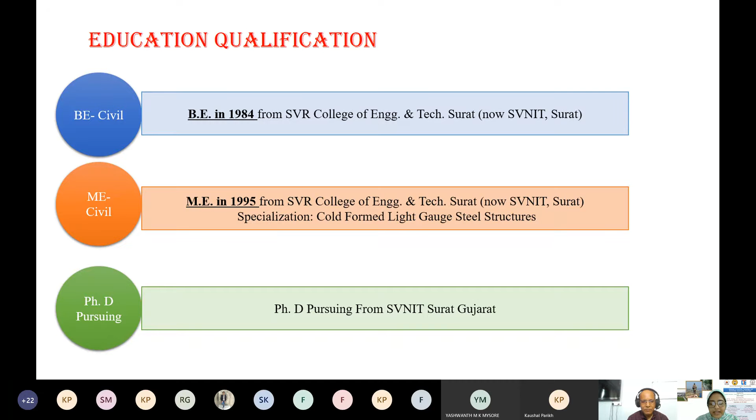In our second session of the day, I hope you all enjoyed your lunch. I hereby welcome all the participants and delegates in our one-week training program on advances in concrete technology and sustainable construction practices. We heartily welcome our expert, respected Professor Jai Prakash Sharma sir. Sir is associate professor in applied mechanics at Government Engineering College, Bharuch, Gujarat. Sir has completed his BE and ME specialized in cold formed light gauge steel structures at SVNIT Surat, Gujarat. Sir is doing excellent PhD work on an innovative technique, sacrificial anode cathodic protection, for protection of steel in RCC from corrosion, and recently he will be submitting 2 patents on it. At the beginning of his career, sir has worked as assistant engineer under Ukai Civil Circle for 5 years.

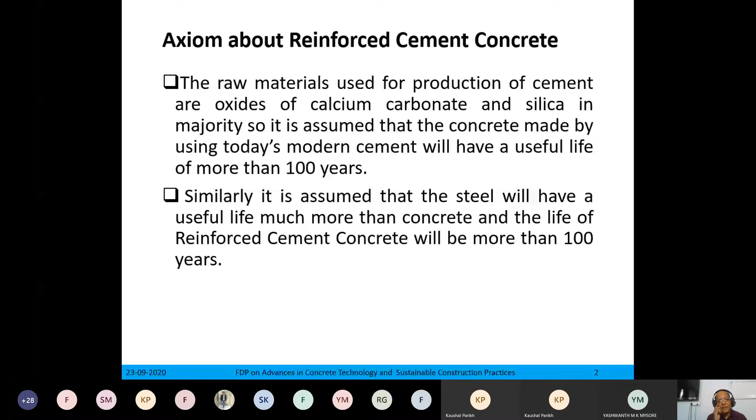Yes sir. So after so much knowledge about the different variety of good concrete, we still face some problems in real practice. What is happening is that the general thinking and well established truth is that the raw materials used for production of cement are natural materials, that is oxides of calcium carbonate and silica. So we are assuming that whatever is made by these natural materials will have a long life, as other things in nature have. So our assumption is that today's modern cement will have a useful life of more than 100 years, since this is made from natural raw materials, calcium carbonate and silica. Similarly, we also assume that steel will have a useful life much more than concrete, and the life of reinforced cement concrete will be more than 100 years, since this is a combination of two materials which have more than 100 years of life. But what is the bitter truth, or I'll say the truth you have to accept?

With the advancement in technology in cement and steel, we became more and more confident that any structure made of reinforced cement concrete will have a lifespan of more than 100 years. This we are assuming, this we are teaching, and in the majority of cases, in costly structures, utmost care is taken, and then this is true. But what about the other structures which common public is making from their hard-earned money or purchasing with their hard-earned money? That is not there - the 100 years life is not there.

What is happening? There is some natural process which is going to happen. It is beyond our control, just like tsunami we cannot control, earthquake we cannot control. Similarly, there are some laws of nature we cannot control. And what is happening in real life is that in the race of development, we forgot the law of conservation of energy, which is responsible for changing one form of material to another form. The cycle may be few hours to 1,000 years. In case of buildings, we can say few years to 100 years.

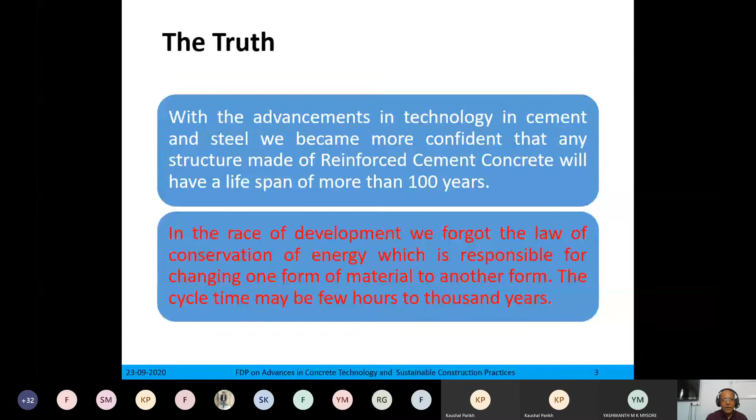Now, what is contradiction against the earlier 7 sessions which you listened patiently? The recent failures of reinforced concrete structures have indicated that if RCC structures are not properly designed with respect to the environment condition, or if good materials and proper construction practices are not adopted, which we are discussing a lot since last 7 sessions, and suppose these two are followed, then proper and timely maintenance is not done, then the deteriorated structures will have no solution but demolition due to corrosion of steel.

Some structural engineers justify this, saying demolition is necessary because previously structures were built for the requirements of that time, and now our requirements have changed, so let us demolish and go for a new one. In a few cases this can be justified, but not in all cases. I will discuss the cases where demolition is not advisable, and if it is not demolished in time, it may collapse someday.

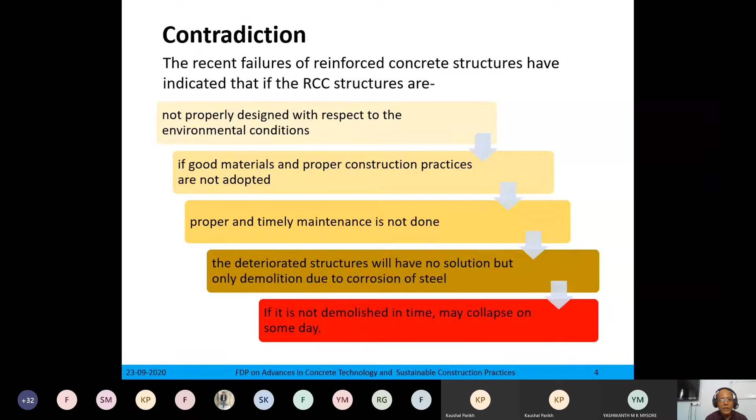Collapse is not a simple word we just use in the sense of 'let's forget these things.' No, recently in Maharashtra, in Raigad, you have heard in the news that a building collapsed and 15 to 16 people died. This was a complete collapse. Similar cases happened here. This is the reality we must accept and take remedial measures so this doesn't happen. It is not only loss of property or national revenue, it is loss of life also.

And why? If we are talking about being so advanced that we can have concretes of very high strength, high workability, durable, every property we have discussed, if that is there, then why is this happening? The reality: there are two cases. One is from Surat, another is from Baroda.

This is the case of Surat. Here also, loss of life was there in Baroda. In this case, this picture shows the drawing room portion. Three floors completely collapsed - the drawing room of 3 floors collapsed around 8 a.m. The second figure shows these 3-4 blocks; 2 blocks of that complex collapsed in the early hours of the morning. In both cases, there was loss of life and loss of property. You can see this Kanhaiya Palace building is demolished.

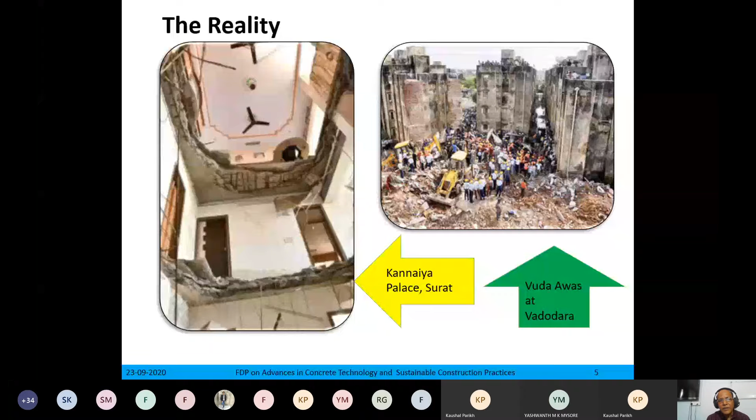Now, what are these 2 cases? These are only 2 cases out of thousands in the last 4 to 5 decades. I will explain the reason later. The first image I showed was Kanhaiya Palace apartment, built in 1994 only. The slabs of drawing rooms on 3 floors collapsed on 2nd May, and 3 persons lost their lives. A complete building was rejected and 3 lives were lost.

Surat Municipal Corporation appointed a committee of expert structural engineers. They gave their report that poor maintenance was the cause of this failure, leading to corrosion. Some concepts were given, and points were also raised that the initial construction was not very good.

The second image, as I said, is the collapse of 2 buildings built by Vadodara Urban Development Authority, VUDA. In every city beyond municipal corporation limits, there is some area defined by the authorities known as Urban Development Authority, and they construct houses for the lower middle class or lower class, or for rehabilitation after removal of slums. In that case, there is a concept of economical housing, and in the name of economy, poor material and poor construction happen. In that case too, corrosion was the major cause.

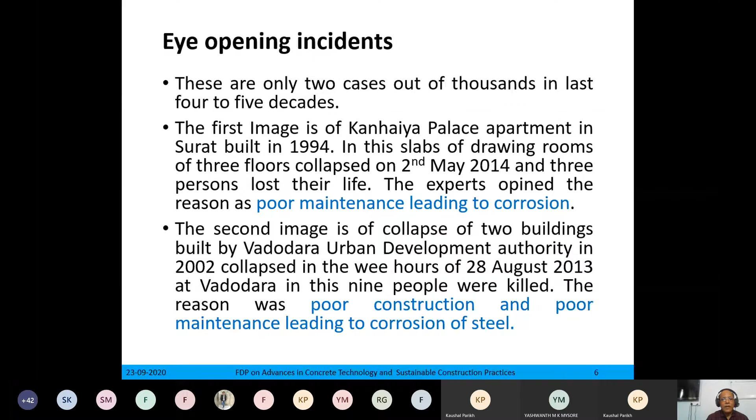Then what is corrosion? This is the basic concept. I have started from the basics so it is useful to persons who are not directly related to these things, so they can understand. It is nothing but a chemical or electrochemical reaction between a material and its environment. There can be any type of environment, any type of material, that causes deterioration of the material and its properties.

In RCC structures, corrosion occurs in both concrete and steel. This is certain. In the case of concrete, there may be carbonation or other reactions also, but corrosion of concrete is very slow compared to corrosion of steel.

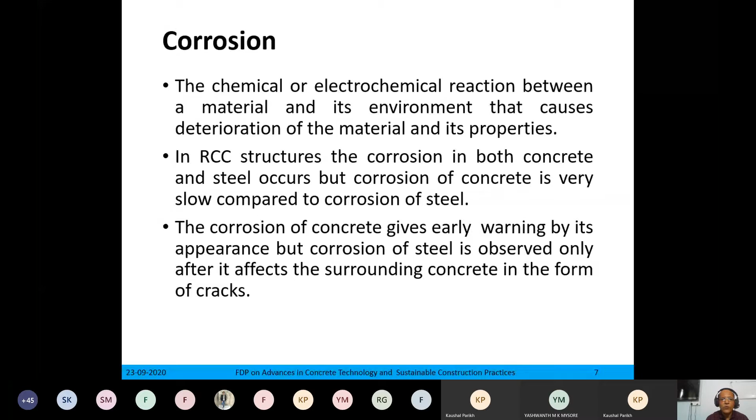But in case of steel, it is observed only after it affects the surrounding concrete in the form of cracks. At a later stage, when the volume expansion of the steel occurs due to corrosive product, at that time you come to know that now there is some problem.

Now, why is there need of corrosion protection of steel in RCC buildings? I have given the need of corrosion protection of steel in RCC buildings. Why have I used this word RCC buildings?

The reason is that for bridges or any government or organization structures, there is provision, they have money, they can go for any type of protection method because authority is there, and agencies are there. But in case of buildings, multiple ownership is there always. So obviously what is happening here is studied and then some remedy is to be found out.

What is expected life of concrete? We have assumed that it is more than 100 years. We also talk about the expected life of steel if protected - it is also more than 100 years. We have one bridge at Narmada, a steel bridge, which has completed 125 years. Many bridges in the world have crossed 100 years. So there is no doubt about the life of steel.

What is happening? The real life of RCC structures, especially buildings, we are finding is only 20 to 80 years. There are several reasons - I am not going deep into that. One of the reasons is the construction practices we are adopting. We devise some method, but less qualified contractors are using that technology without, I'll say, precaution.

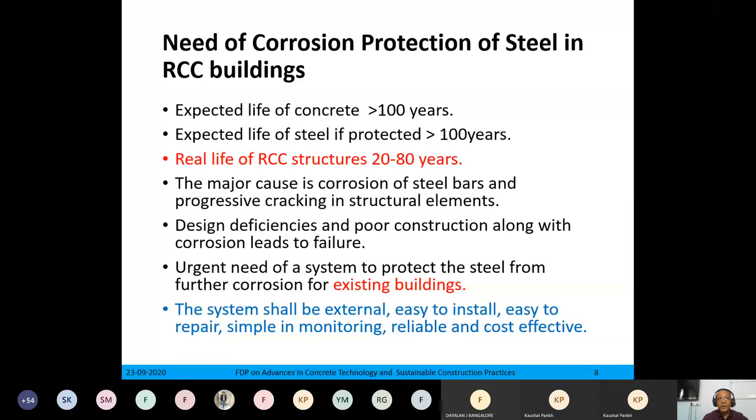So first let us understand the mechanism behind this corrosion, and on that basis the technology will be better understood. The corrosion process in RCC is electrochemical in nature.

The process is very similar to a battery. Everybody has seen the single cell. What is happening - the outer side is zinc body, the inner side, in the center, one carbon rod is there, and in between these two, electrolyte is there, and at the top plastic body is there to separate that. Whatever current flows, flows through that electrolyte.

Previously, if someone can remember, in the torch or some radio or other equipment, the batteries were leaking. Later on, the technology improved and we got cells like that - there is no leakage in that.

Corrosion is nothing but the result of flow of electrons between cathodic and anodic sites of rebar. Suppose one reinforcement is there, on that one spot behaves like anode, one spot behaves like cathode, and current flow starts. Four basic elements are required for corrosion to occur: anode, cathode, electrolyte, and metallic path. If we can control these four, then there is no corrosion. But how it is not possible, I'll explain later on.

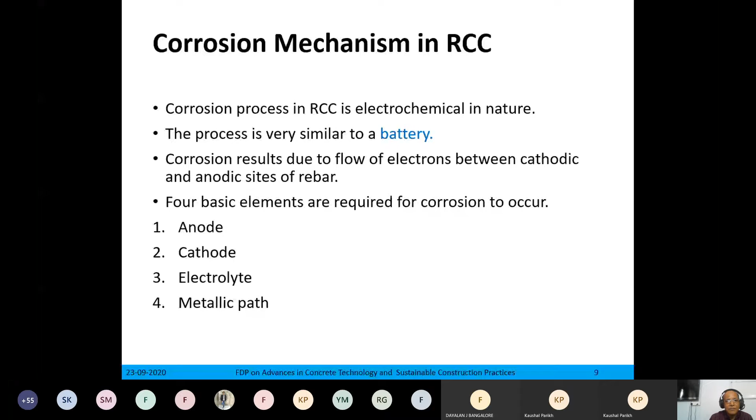What is the anode and cathode formation? It is steel embedded in concrete. For corrosion to occur, an electrochemical cell must be established, meaning these four elements are there, as explained earlier. The anode is the area where oxidation occurs and electrons are released. Whatever metal is there, if in stable condition, then it's okay. But if it is disintegrated into ions, plus or minus, from there the electrochemical cell is established. The cathode is the area where reduction takes place or electrons are consumed. This is theoretical part; later, in pictorial view, you will be able to understand.

Steel in RCC acts as only cathode when it is in passive state, meaning initially you find that there is no corrosion. The reason is that the pH of fresh concrete at initial stage is always more than 12. Later on, it goes on reducing due to carbonation or other factors or material properties mixed together, and the pH reduces to 9.5. Lesser than that, when pH is less than 9.5, there are chances of corrosion. That's why initially there are no cracks, meaning no corrosion. After 4 or 5 years in buildings, you observe some cracks in beams, slabs or columns, especially below the bottom of washrooms.

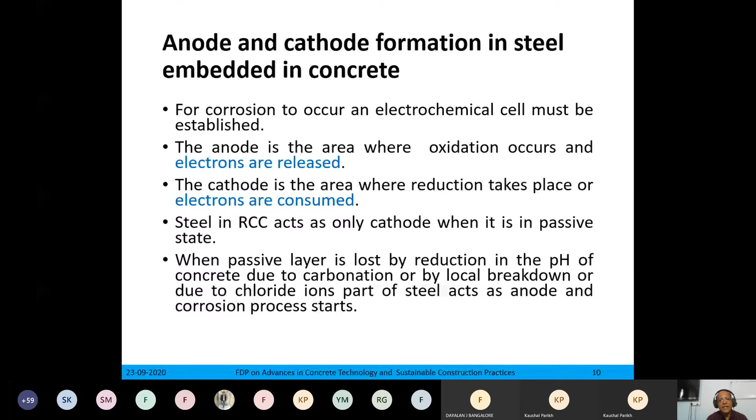When this passivity is lost by reduction in the pH of concrete due to carbonation or by local breakdown or due to chloride ions, part of steel acts as anode and the corrosion process starts.

Now this is better explained. The iron disintegrates into plus ion and electrons are released. These electrons require two things: moisture and oxygen. If any one is missing, corrosion will not occur. For example, at seashores, certain structures in saline water show corrosion at the level or height where fluctuation of water takes place, meaning wetting-drying process occurs, so it gets oxygen and moisture both. So at the cathode, these electrons combine with moisture and oxygen and form hydroxyl ions, that is OH minus ions.

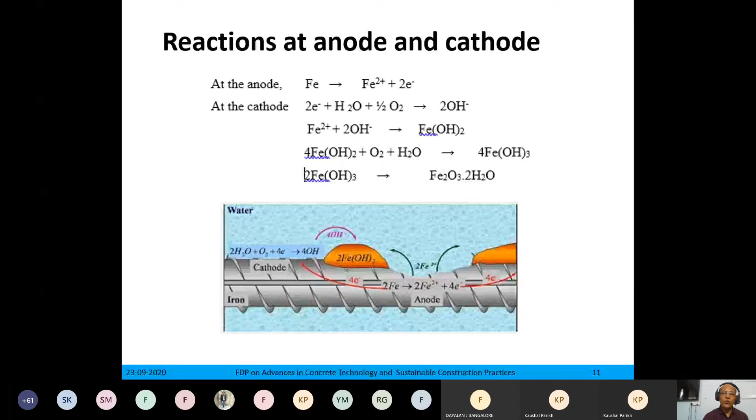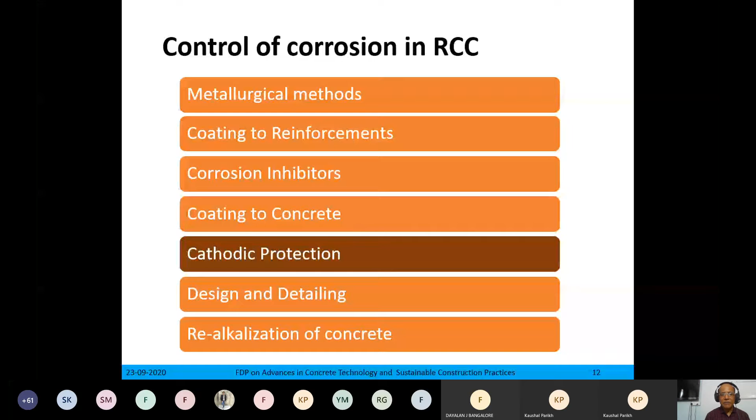Then the question is, if so many methods are available, why is corrosion still there? Why are we allowing corrosion to happen in RCC structures leading to ultimate collapse? We are lacking somewhere, and I have tried to find one solution to that, which we will discuss later. If you see the methods for corrosion protection, one is metallurgical methods. In that, one is CRS, corrosion resistant steel, made by Tata, SAIL, Jindal, and many other companies.

This was introduced roughly in 1995. It has a property that, while there is some corrosion, it forms a film on the surface of the steel bar that is nearly orange color, not dark red like rust, and that film delays the corrosion. Please remember, it only delays the corrosion - you cannot say this is 100% corrosion resistant.

There is no loss of corrosion resistance during transportation, bending and compaction. This is a very good thing. In Surat, I have seen a structure built in '96 or '97, and till today I have not seen any crack. That is this steel - I tested it also, so I know this is a good thing.

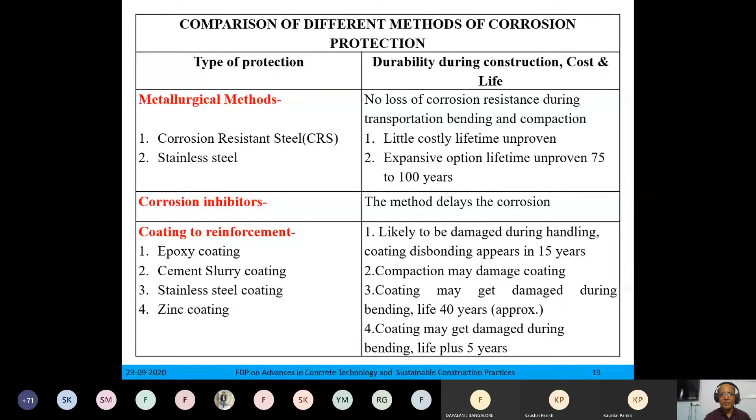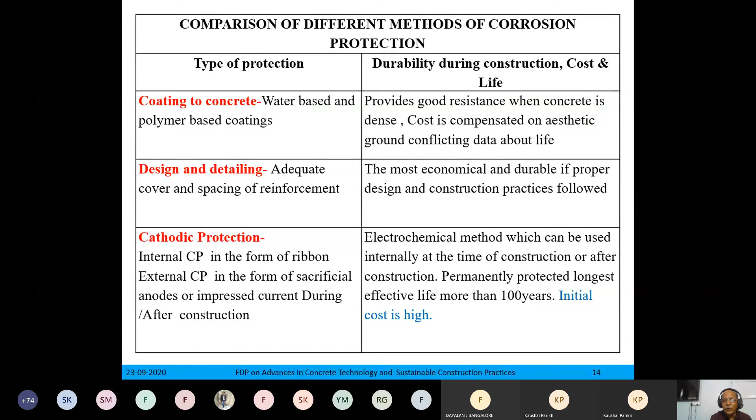So here it is just like a remedy, that we are providing anode that takes care of that building. It is just like indirect insurance. It protects the buildings and the life is unlimited as long as that anode is available.

Another method is realkalization of concrete. Here, suppose pH value falls below 9.5, we are increasing the pH of the concrete. We provide external current to the carbonated region of concrete to increase the pH to a satisfactory level, above 9.5. The process is not very common.

It is applied to carbonated concrete. Cost is high, but life is unpredictable. The reason is that once you increase the pH, for how much time it will remain above 9.5 is a question, because again the environment is same, everything is same. So here life is unpredictable.

And second thing, this is very specific technology. You cannot make people confident that okay, you have adopted this process and now the corrosion will not happen. This is one of the drawbacks.

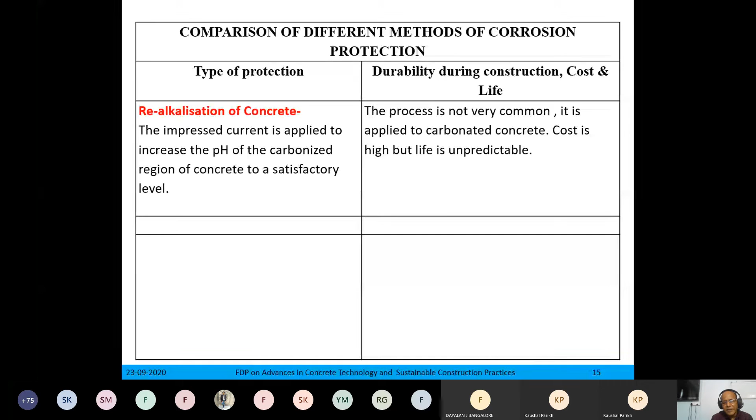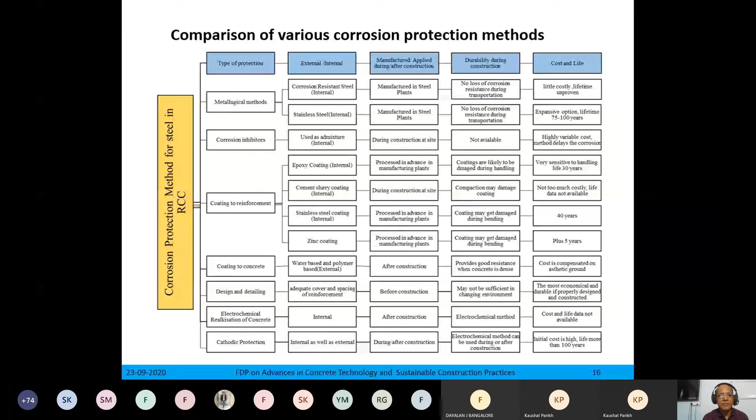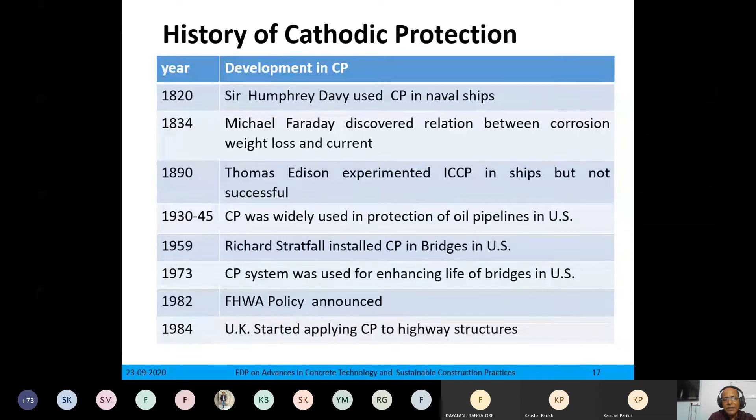Okay, so after 200 years, I can say you can also judge how many buildings you have seen where CP is installed. Probably 50% of the participants have not seen that anywhere in a building it is installed.

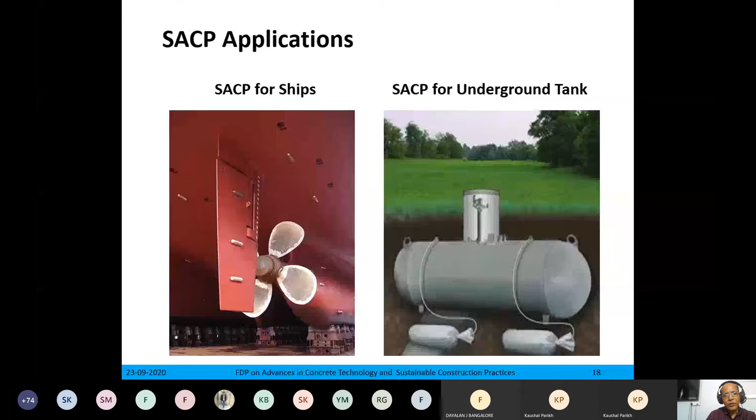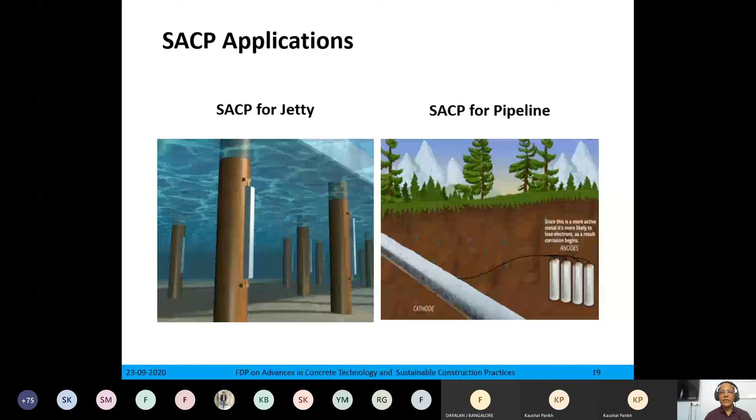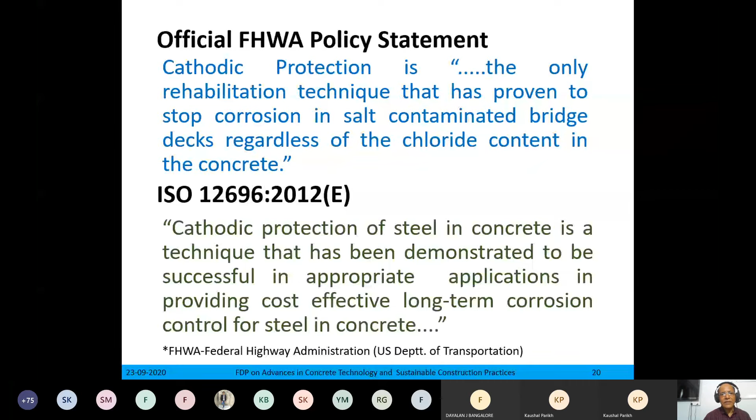Now, these three documents I have put here, they say cathodic protection is a means, and somewhere they say it is the only means.

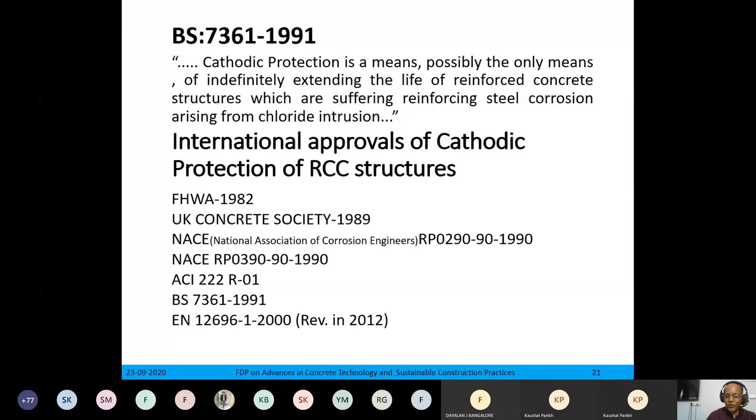Only thing is, after so much detail, why is it not common for buildings? This is common for pipelines, there is no problem, but it is not common for buildings.

Then another question is whether you can apply this cathodic protection system to new structures initially from the beginning. So for that, these documents say it is uncommon to find the use of cathodic protection justified for a new structure at the design stage if alternate economical means are available to prevent corrosion. Now please listen, alternate economical means whatever we have discussed earlier.

If compared to cathodic protection, other options may be economical. Suppose you are using CRS steel, so that is economical, so it is better to go for that rather than cathodic protection. Or if you are using corrosion inhibitors, which are chemical and mixed into the concrete, if they provide good resistance to corrosion and long life to a structure, they shall be used instead.

However, if a decision is taken at the design stage to apply cathodic protection to a new structure, provisions can be made during construction to facilitate the later application of CP. If certain provisions are made in the new structure for the future, then if something happens, we can go for cathodic protection. The authority has to decide whether this initial provision is required in the structure.

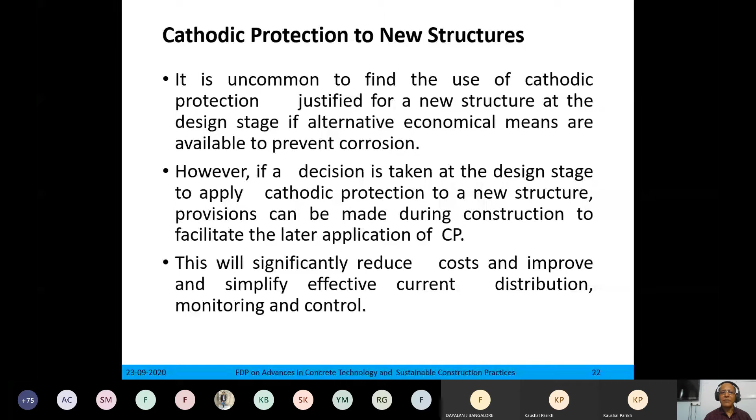So what type of provision is possible? One is that we need exposed steel, or steel covered which can be exposed later on to connect the anodes. This provision becomes economical, useful for aesthetic view, and ensures proper connectivity of anode if possible. So once we decide that we need some provision for later cathodic protection, that provision can be made. Now there are two systems.

This is the broad classification. One is impressed current cathodic protection system. Here we are providing anode as well as providing current. Whatever current is developing between those two dissimilar metals, we use that, plus we provide current from outside. The large driving force available can protect a large, even uncoated structure in high resistivity environments.

For example, suppose a pipeline is there, 1000 kilometers long. Just imagine how many anodes are required throughout the length, and suppose the life of an anode is 3 years, so again at the time of replacement a new anode is to be installed. That is a costly process. So for that, impressed current CP system is most suitable, and obviously only a few anodes are required.

Second thing, wherever the potential difference is not developed or is very less, which is not able to effectively protect the steel from corrosion, because potential difference is required for flow of current, here artificial voltage can be improved. You can increase the voltage. Generally it works at 24 volts, so you can go for a higher one.

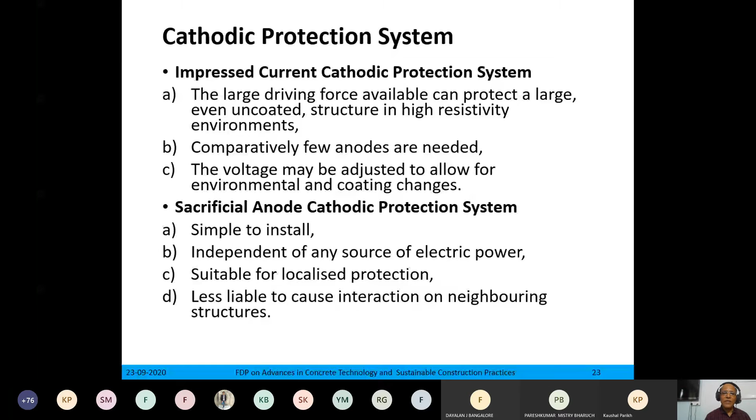The flow of electrons is possible only when a conductive solution is there. So corrosion takes place when two different metals are immersed in a conductive solution or environment. The potential difference facilitates electron flow between these two metals. The less resistant metal becomes anode and the more resistant metal becomes cathode.

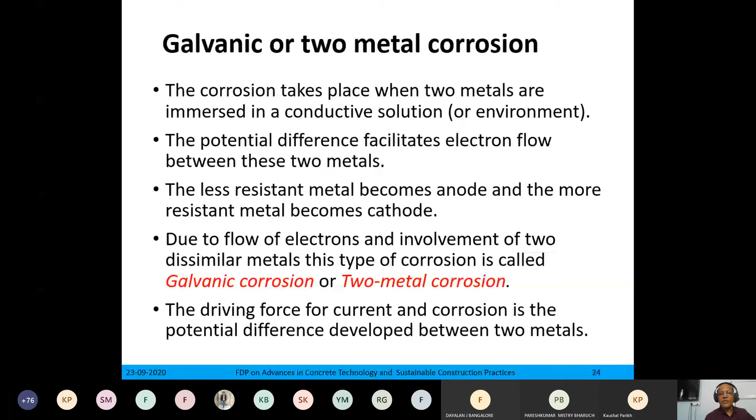What is less resistant? It will come in the next slide. Due to flow of electrons and involvement of two dissimilar metals, this type of corrosion is called galvanic corrosion or two metal corrosion. The driving force for current and corrosion is the potential difference developed between two metals, and this is the inherent quality of the metal.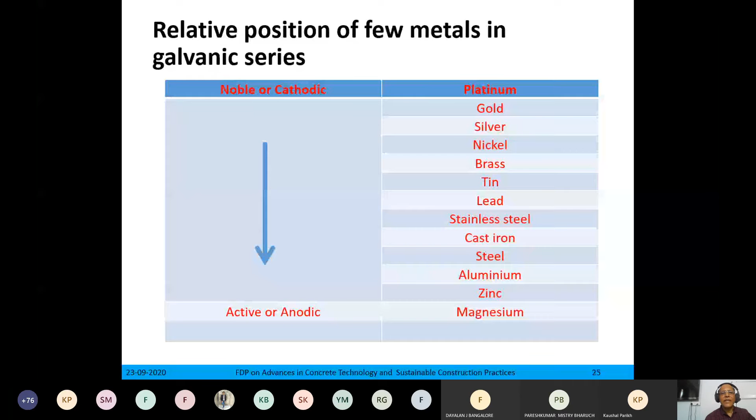If you join these two metals and externally connect them and dip these two metals in an electrolyte, electrons will start flowing and that will convert the anode material into an oxide of that material, and a current is generated.

The same thing is happening to our steel also in RCC. So what is happening here is that steel, having a standard electrode potential of minus 0.44, is converted when anode and cathode formation occurs.

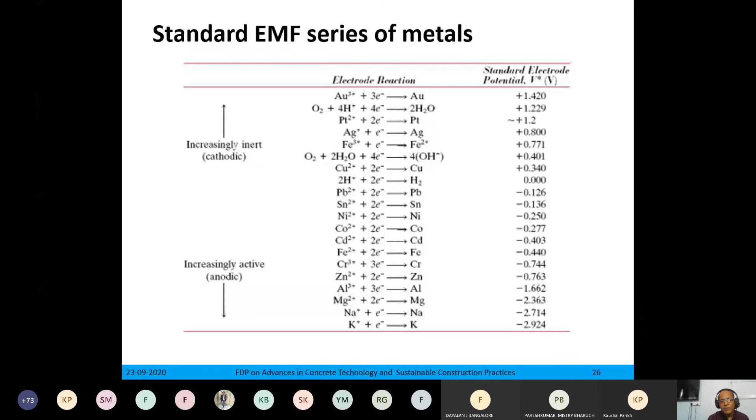Sorry, zinc is 0.763 and this is 0.34. So the difference will be approximately that, depending upon metal quality, impurity and purity also.

So what is done? This anode is buried in soil near the pipeline, and the top wire is connected with nuts and bolts to the pipeline. It is surrounded by backfill material, which is bentonite and gypsum, providing longer retention of moisture so that the electricity circuit is complete, and generally the distance is 3 to 5 meters.

When a pipeline project starts, they keep it in segments, suppose 400 to 700 meters, and they do not join them. So it is one piece of metal, iron or steel, and then this is another anode, they are connected together. Later, when the complete pipeline is laid down, they start connecting and switch over to ICCP, and whatever cables are laid provide current to the pipeline, and the direction of current is such that it attracts and consumes electrons. So our electricity is consumed, but the pipeline is protected.

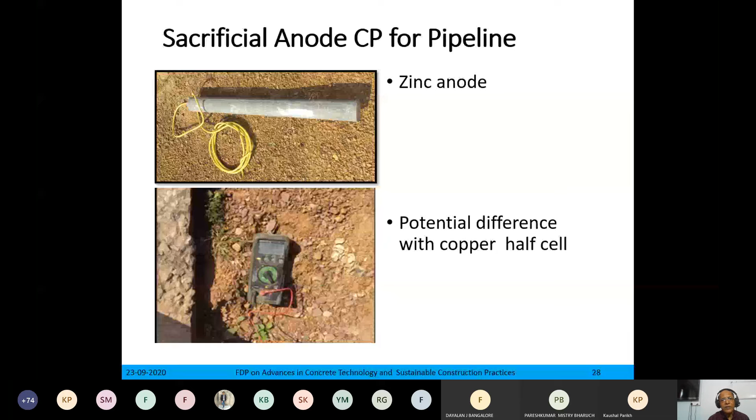Here also, you can see the potential difference between installed zinc anodes and copper half cell. These type of junction boxes are installed generally, they try that it should not be more than 1 kilometer apart because the wiring is costly, but it is generally near the roads for inspection. So every day or weekly, whenever they move from there, they open this, a number of terminals are there. So they can detach and take the potential difference of the anode only, of the pipeline only, or of the connected circuit. Every feasibility is there.

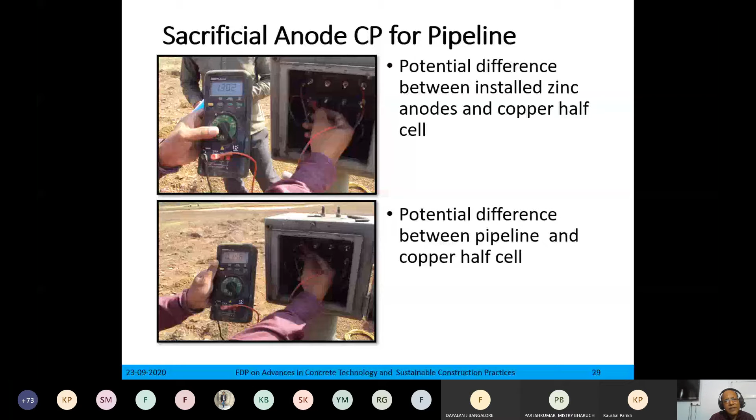Here if you see the bottom figure, it is 0.746. It is the potential difference between the pipeline and the copper half cell. If you see the difference between plus 0.4 and minus 0.37, nearly it is 0.746. So these type of junction boxes are always there along the pipeline, preferably near the roads or inspection roads, so that they can inspect what is happening there. If the anode is consumed, they will not get this value, so they will dig that spot and provide another anode at the same place. This is very common for pipelines, it has started since 1930, and more than 100 companies in India are doing this work.

Now this is the anode for RCC. These are known as button type anodes, discrete anodes. What is done is it is placed in concrete at the time of rehabilitation or repairing, and one terminal wire is connected to the reinforcement. Now this is one part. Another part is that the concrete portion acts as electrolyte. So one complete circuit is made. Whatever electrons are released by the reinforcement are consumed by these electrons.

Here monitoring is not possible. It is just like taking one paracetamol tablet - you don't know what is happening inside the body. Once again, when you feel there is some problem, you take another medicine. So after some time, if cracks are developing, they inspect, open the place, and again other anodes are placed. In ribbon type anodes, this is placed parallel to the reinforcement but not touching it. Please remember, this will not touch. At the end, it will be connected to the reinforcement. So whatever reinforcement is there, that will be taken care of by these ribbon anodes, and the distance between the anode and reinforcement, whatever concrete is there, will act as electrolyte, allowing flow of electrons.

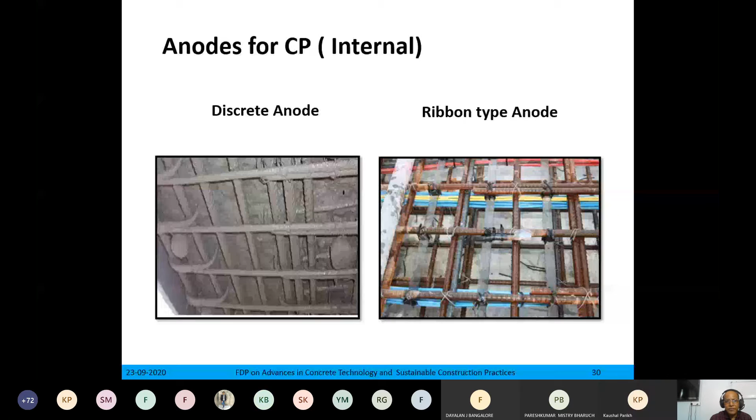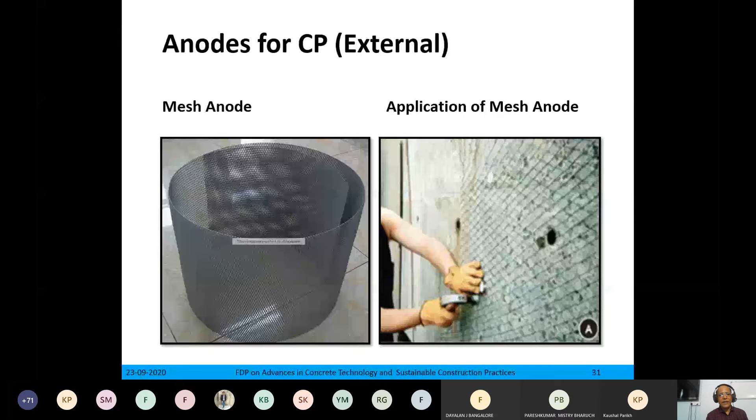Here also monitoring system is not there, they only measure the potential difference of this anode with respect to copper sulfate half cell potentiometer, and accordingly they decide whether it is working or totally consumed. Here, in this case, the name is sacrificial, meaning the metal will be consumed.

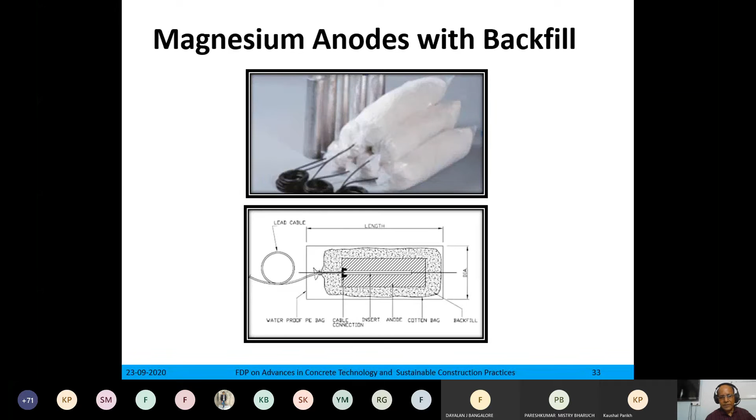Now this is the magnesium anode with backfill, similar to what you've seen in pipelines. This is the anode placed in tanks as well. This technology is very common in oil industries, because storage tanks also have anodes provided at the bottom and on the sides, everywhere. Only then is it possible that a steel tank housing lakhs of liters of fuel is safe. This second figure shows the detail of that.

Now from here the actual work starts, that is, how to make this technology common for the general public.

I have tried to develop a sacrificial surface anode for cathodic protection of RCC structures, especially buildings. This can be used for any type of structure. But wherever saline water is available, like at a jetty, no other technology is required since the saline water itself is electrolyte, and we can use cathodic protection directly. Wherever that is not possible, this system is developed.

The cathodic protection system is well established for metallic and other structures, but a simplified system is required for RCC structures.

The reason is, when you are not doing monitoring, how will you convince the public that this is working? It's just like black box technology, where you say, okay, I have put an anode inside and this will safeguard the steel.

So there is a need to develop a cathodic protection system for existing buildings which is external, easy to install and replace, facilitates monitoring, causes no loss in aesthetic appearance, and is reliable and economical. If these objectives are achieved, only then will this become popular. Otherwise nobody will bother.

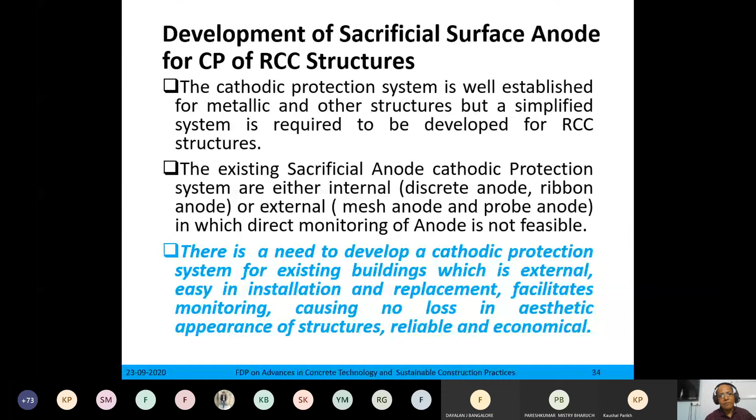So I developed a first stage sacrificial surface anode. The purpose was that I wanted a type of anode that can be placed on the surface, with no drilling, because for damaged or deteriorated structures it is very risky to drill holes to place the anode inside, or even chiseling the cover concrete is dangerous.

So I wanted that, okay, at this stage the building or structure exists, I will provide everything externally so that corrosion is not there going forward, and it will remain in the same condition as it is today.

After the success of stage 1, the modified design of stage 2 sacrificial surface anode was developed. In the previous one, there was no clamping facility to clamp on the surface. Here a PVC pipe, which was used for drainage purposes, is used, and in that the anode is placed with backfill material. This half portion is cut so that one chord-type cut section remains in contact with the concrete surface. Backfill of gypsum and bentonite is used.

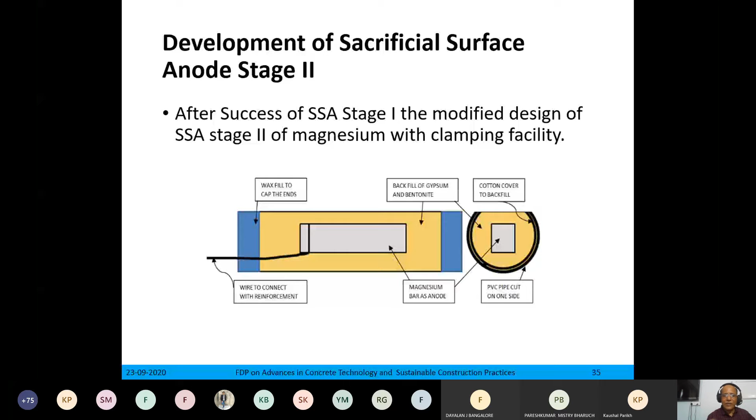Both ends are sealed temporarily with wax, because other materials weren't available at that time. This was made for testing only. Now this is the actual anode, installed in a multi-story building, Sunstar Apartment. You can see the result after 2 to 3 months, this was the condition.

Not only that, this shows what was happening inside, recorded by a Hioki Japanese data logger, and here are the results. This is the potential difference measured in the circuit between the anode and reinforcement.

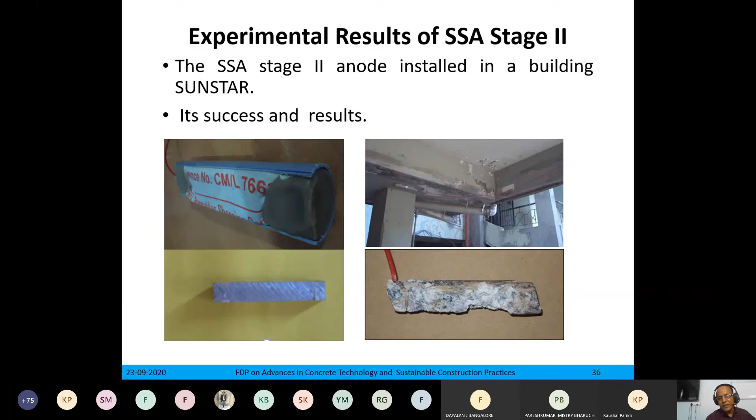In this right side figure, it is not shown where it's connected, but in other figures it is. So whatever you see in this vertical line, one day it was tested that this is dropping. Suppose the owner is not there and not using the washrooms, so obviously the concrete will start drying, so this drop is there due to drying of the concrete slab.

So I sprinkled water, and after 2 hours this vertical line rose suddenly as soon as the moisture reached the steel reinforcement surface. So obviously this shows that moisture is one of the important factors for the working of this anode.

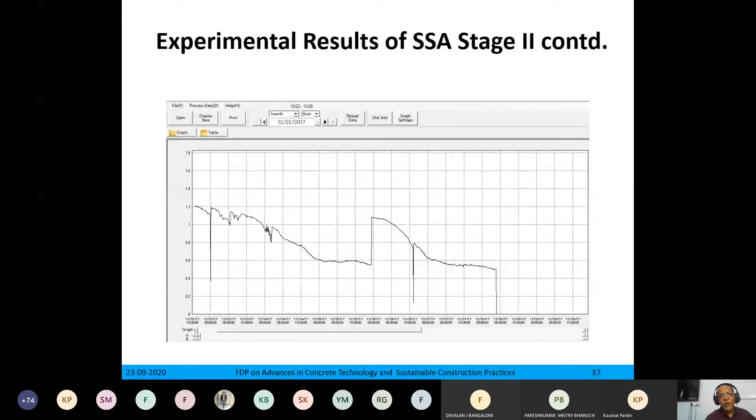Now this is stage 3. Here you can see this is a polycarbonate box used as a junction box for electrical work. The cover is removed from it, and whatever holes are at the 4 corners will be used to fix the anode on the concrete surface. This is thick cotton cloth, similar to what's used in water purifier systems.

In that, bentonite and gypsum are mixed, and in that the zinc anode, which is pure zinc 99.9%, is placed with the wire connection.

At the bottom here you see this PVC flexible sheet, 8 mm thick. Whenever corrosion takes place, volume expansion will occur, so to accommodate that volume, this PVC flexible sheet is there. This sheet provides pressure so that the surface remains always in contact with the concrete surface.

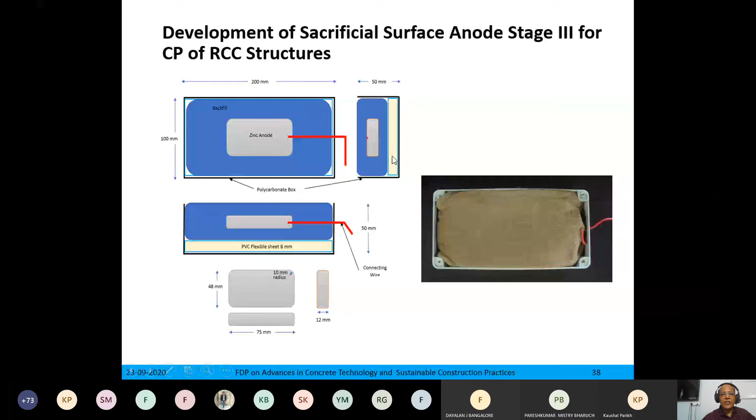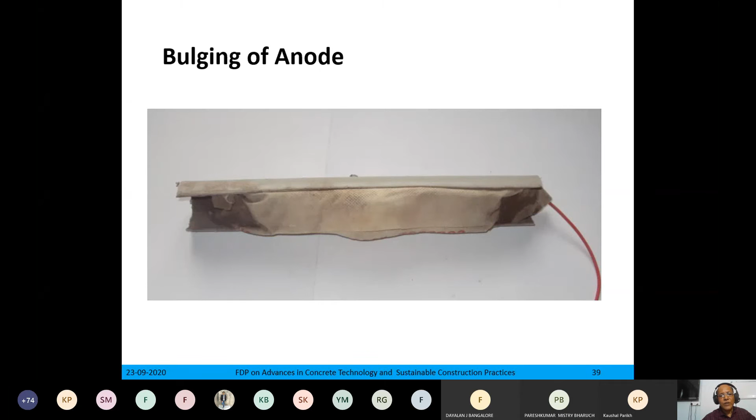So for that purpose this PVC sheet was provided. This was visible - volume expansion was one of the problems in stage 2. To accommodate this volume expansion of the anode material, this sheet is provided. You can see this is the volume expansion of the previous sample, this is after corrosion - this bulging of the anode. So that thing was to be taken care of, that's why the PVC sheet is provided.

Now how does the working of SSA happen? See, this zinc anode is fixed on the concrete surface in the vicinity of reinforcement. Obviously in a column where reinforcement is there, in the slab also it is equi-spaced, so there is no problem. In a beam we can fix it at the bottom. So almost just like an astrologer, we know where reinforcement is there, so we fix it at this place.

From here electrons are released - this movement of electrons is there, and then it is deposited on this anode material. This is at higher potential value, so current will flow from reinforcement to anode, and in the reverse direction electrons will flow. When it flows in the circuit with the conductivity of concrete, it will move again here, and oxidation of the anode material will be there. Whatever is less noble material, that will go for oxidation. Only thing, our circuit should be complete.

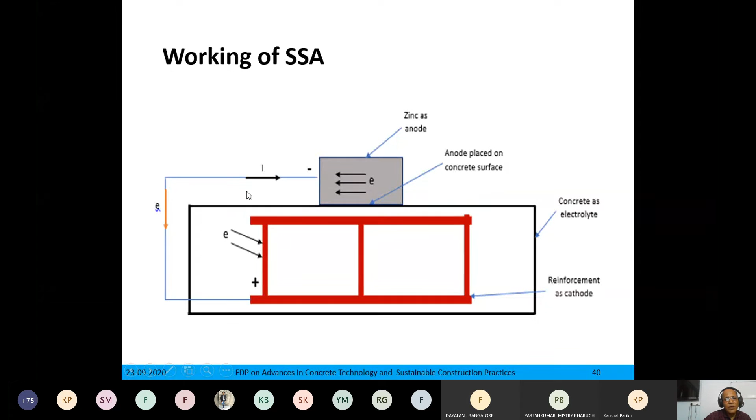So here this concrete cover provides or acts as electrolyte. The benefit of this technology is that all our reinforcements are connected. Wherever electrons are released, that will move through the reinforcement, it will cross this, and reach the anode. So the flow of these electrons shall be facilitated.

Now in case of columns, we can use that at the top. You can take out the cover of two reinforcements and check the connectivity between each other, so that you know these reinforcements are connected to each other. With the help of lateral ties, electricity is continued. From one terminal connected at top, this terminal is joined to the data logger. Again from the data logger one terminal is taken and connected to the sacrificial surface anode.

Now this is one part of the circuit. Another part is the reinforcement itself, another part is... so the complete circuit is there. So wherever corrosion occurs, electrons have to flow through the reinforcement, and then it will be consumed by this sacrificial anode. So the only question was whether this will work or not.

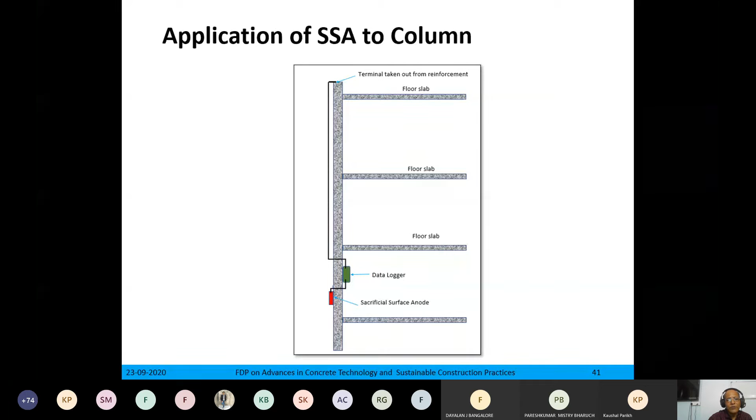This was the condition - I have tested this, and current is flowing, voltage and potential difference is maintained, everything is there, so this is working. This is one of the reliability aspects of this system, that we are fixing it on the surface and still it is working.

This is the building in which about 8 anodes are installed on the periphery, at the bottom, in the parking area. Now this has undergone repairing. You can see that these two columns are erected later on - please remember this wall column and this column were not there, and this landing was in dangerous condition, so these extra beams are provided - this beam plus this, and here also one beam is there, and this column is erected separately, and now the condition is such that it is a part of the building itself.

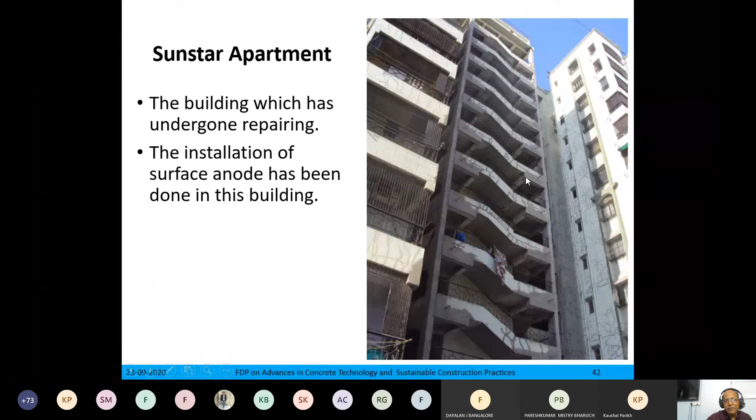So on the periphery of this first floor, anodes are installed for study purposes. Now you can see here, that is point number 1. At the time of repairing, wires were tied to the reinforcement. Similarly, 8 points are there. These are wires, and later it is repaired and plaster is applied, and the wires are checked for conductivity, and these wires are tested with respect to a half cell potentiometer of copper and copper sulfate, and potential difference is checked. Where this is useful, I'll show you.

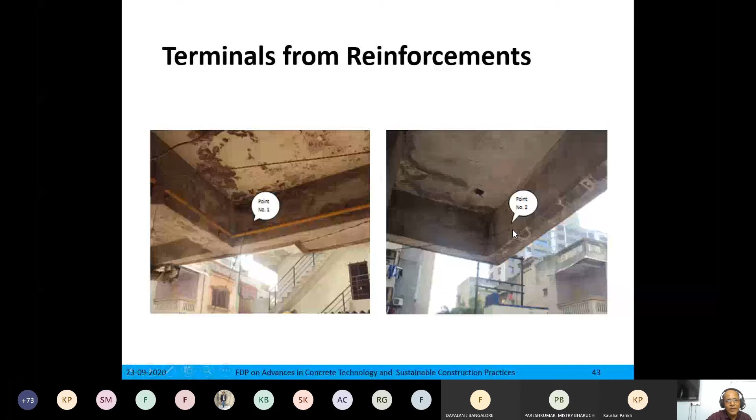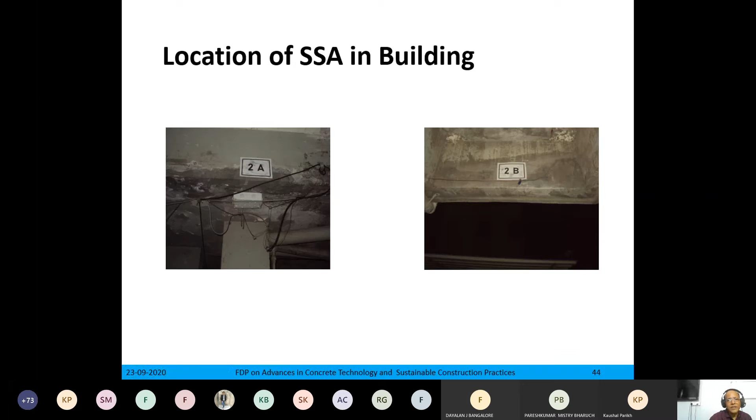And these 2A, 2B points - 2A is where the anode is, this is point number 2, and 2B is where the reinforcement is taken. These other wires are for the building, only the wires connected to this are the wires required for the anode. So this type of nomenclature is there: 2A and 2B - 2A is the anode point, 2B is the reinforcement point. So it is connected.

This is actually a 16 channel data logger. First 8 channels are potential difference and last 8, that is 9 to 16, are for current flow. Now this makes sure that whatever current is generated due to corrosion, that is recorded here.

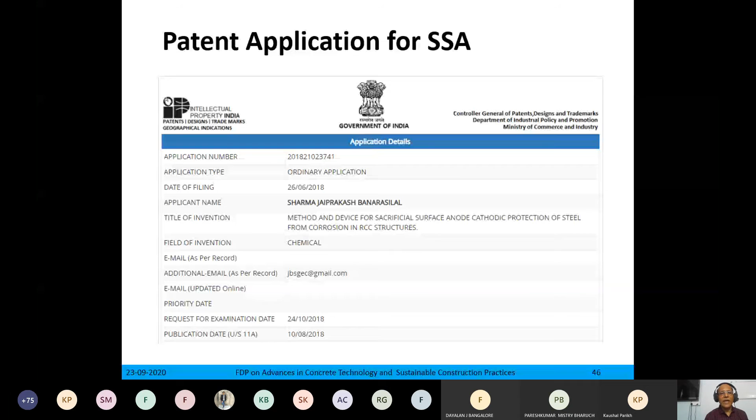Now there is one patent similar to that, Canadian patent number CA 2741304C. In this, if you see, first chipping of this loose concrete is done, whatever is damaged.

In my case, I do not allow that, go for chipping, because it again weakens the structure. Then a bigger hole is made to put the anode. So obviously you are making a hole, suppose this is a column, so this much concrete is removed, then holes are made. So that may be dangerous in some cases.

In this hole, anode with backfill is inserted, and that anode is connected with metallic conductor to the reinforcement, and then again this is covered with concrete. Now here this terminal is connected to reinforcement. This anode terminal is connected to reinforcement.

Now you cannot monitor this, only you are given a guarantee that corrosion will not occur, because inside this, backfill solves two purposes. One is that it provides a surrounding volume for expansion or corrosion of the anode metal, because volume of corrosion is always more.

So in this technology, in this patent, it is not possible to monitor what is happening inside, whether the anode is consumed fully or it is still there. Okay, it is not known. Again, on the surface, if a crack appears, then you will come to know that corrosion has started. So in my case, monitoring is always there.

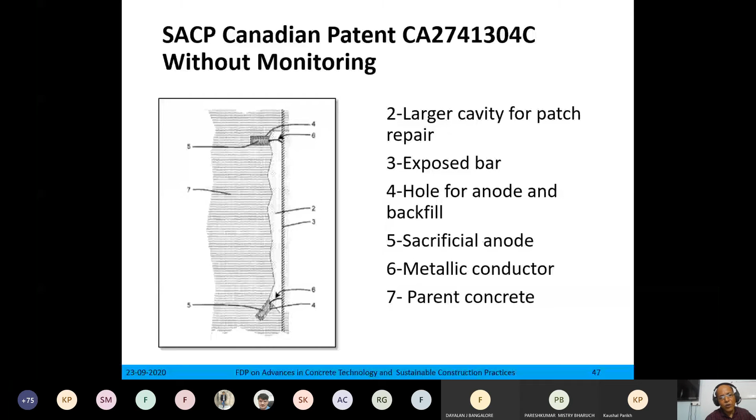Now here if you see, 1A, 1B is there. 1A is the position of sacrificial surface anode, 1B is the terminal taken from reinforcement. The distance is approximately 5 meters. Now here distance word is very complex thing.

The reason is that I have taken shortest distance. I assume that if two points are connected with the same cross section of wire, one length is 5 meters, another is 50 meters, so current will maximum flow depending upon the resistance of two wires with the shortest path. So here also this is going to happen.

Suppose I am using in slab, so in slab number of bars are there, they are connected by distribution steel. So current can flow in any direction, but obviously the shortest path will have maximum current. So for that it is given, but it is very complex thing to define what is the effect of this system.

Now if you see there, this value is the half cell potential of the steel by copper sulfate portable potentiometer. Now this is very dangerous. I have had photographs of the building in which almost 80%, 70% corrosion was there. Somewhere diameter 12 mm bars were nowhere there. I have seen that case.

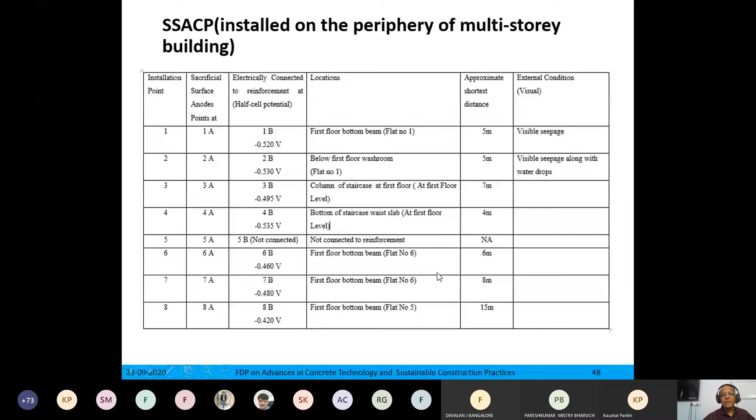Here visible seepage was there in 1A, 1B, 2A, 2B, visible seepage along with water drops are there. There it was connected. Now see how much dangerous it is, that surface potential relative to copper sulfate reference electrode in millivolt.

Chances of underlying steel actively corroding, in terms of percentage. If it is less than minus 200 millivolt, 5% chance. If it is minus 200 to minus 350 millivolt, 50% chance, and beyond minus 350, it is 95% chance.

That's why I was saying I have seen physically that reinforcement was missing at some places. The reason is 100% loss of metal was there because all values are more than minus 350 millivolt. So this was the condition, and that's why I got very fast results. Otherwise it is very difficult to get results in case of corrosion process in actual practice. If you are going for accelerated corrosion in laboratory, it is very simple because metal is well defined, anode is well defined, and your electrolyte is well defined.

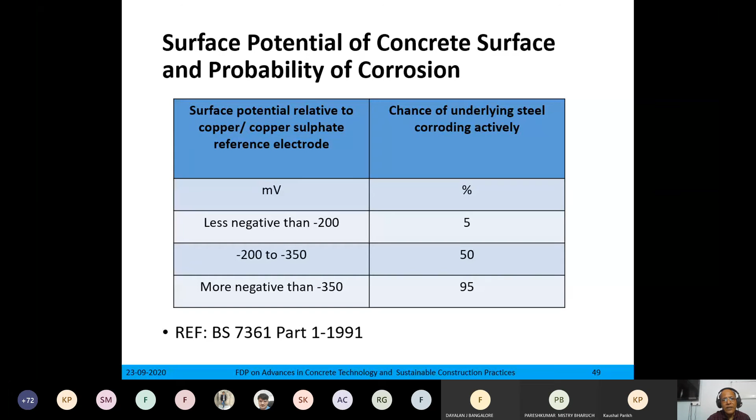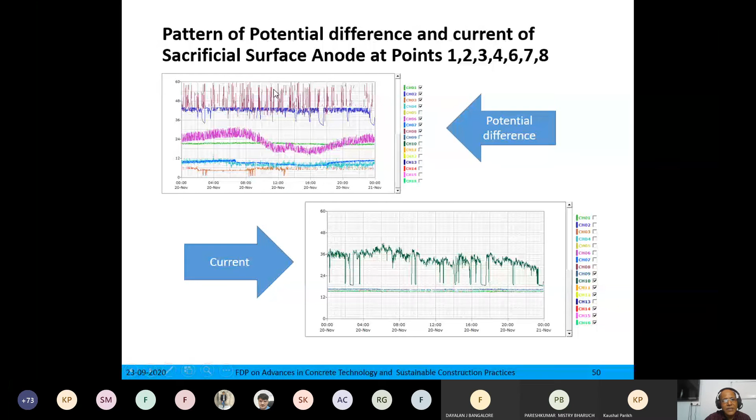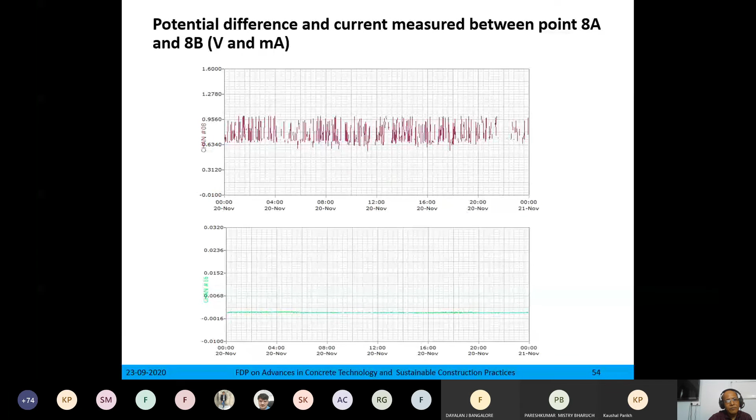Similarly, this is for 3A and 3B. Here also constant current is there, very less, but potential difference is there. That is facilitating the flow of electrons, and these electrons are consumed by anode, that is zinc metal. This is for point 8A and 8B. These 4 samples are taken.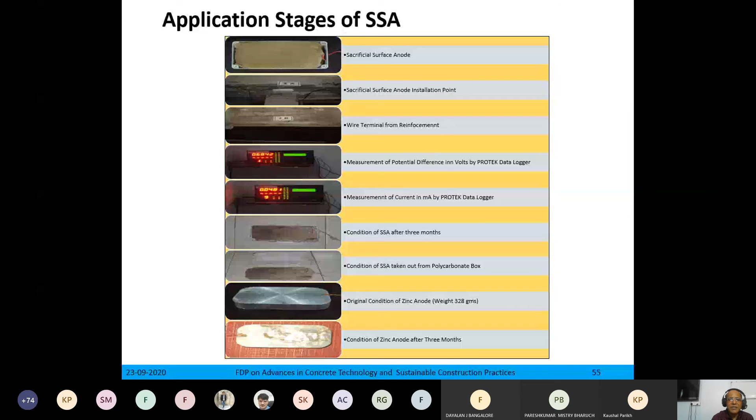Now, various SACP systems I have explained, so what is the problem with that? See, probe type anode requires drilling always, drilling of hole, and the probe is inserted into concrete along with backfill. Monitoring through measurement of voltage and current is possible, but I don't know why monitoring is not provided by any company, which I have seen through its website. There is possibility of cracking of concrete and again propagation of cracking when drilling, because drilling requires at least 25 to 30 mm hole, or more. You can imagine if our column is 300 mm by 300 mm, already the condition of column is not good, if you are drilling in that, what may happen?

Then in case of mesh and ribbon anode type, ribbon is placed inside, mesh is placed, and then it is covered with low resistivity mortar. So monitoring is not possible except from surface appearance and crack development, so this is one of the problems. Thermal sprayed surface coating is another technology, where you spray molten zinc, just like you see GI corrugated sheets. This technology is costly, monitoring is not possible, and surface appearance and crack development is the only monitoring method.

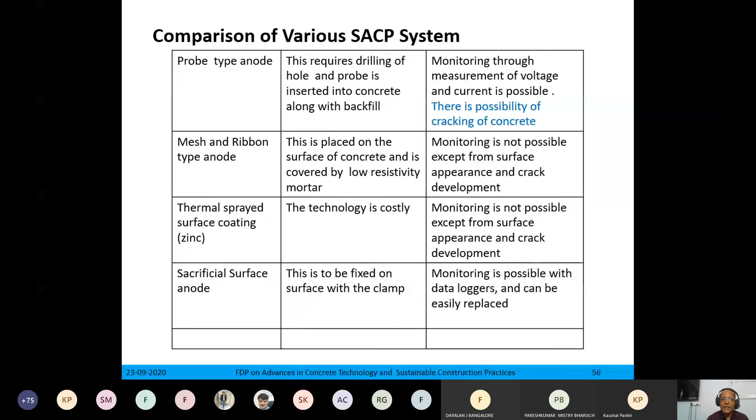In case of sacrificial anode, which I am proposing, this is to be fixed on the surface with a clamp without doing anything to the deteriorated structure, and monitoring is possible with data loggers and it can be easily replaced. Replacement is easy because it is external on the surface.

Now, what are the factors influencing the working of SSACP? Obviously, whatever the properties of concrete are, that is going to affect it, because this system is dependent upon the property of the concrete cover, that is the concrete between the sacrificial surface anode and reinforcement. So all properties related to concrete are going to affect this. The same I have listed here.

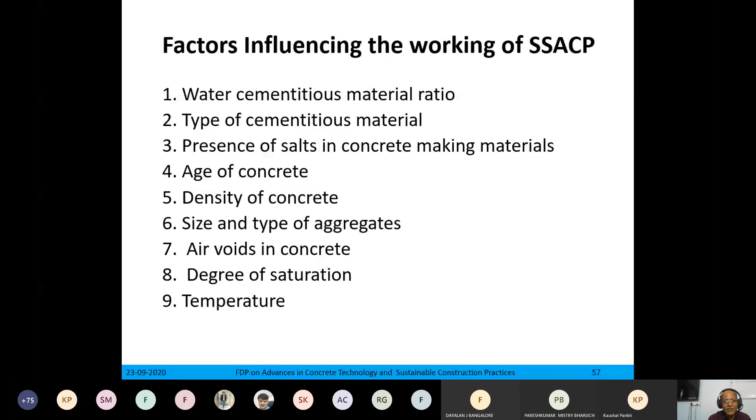So this is the case where sunlight falls on the outside, because the anode is fitted on the inside surface, but the thickness is 5 to 6 inches, and outside sunlight falls, so that reduces the conductivity of concrete due to loss of moisture.

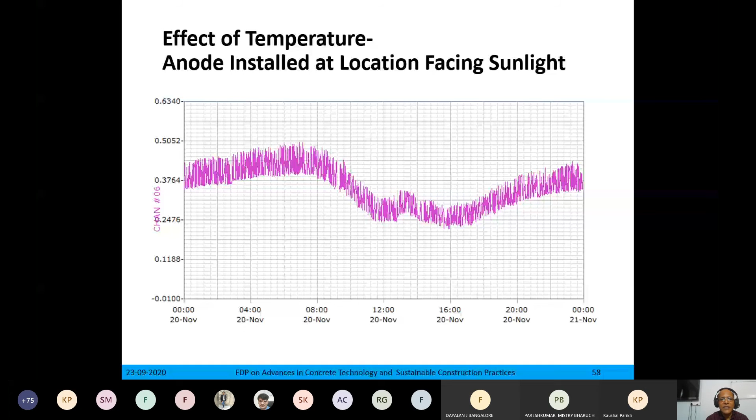Then what are the reasons that CP is not common for RCC buildings in India? Abroad it has been tried, but there also it is not common. The reason is that the cost of buildings is considered very less compared to the cost of bridges, cooling towers, and other important RCC structures.

This is the older concept. Nowadays, if you go to purchase any flat in Bombay, you will find that the cost of a flat is 10 crore rupees. In Surat too, costly buildings are there, so flat costs are 1.5 to 3 crore rupees. Suppose 50 flats are there, you can imagine it is nearly equal to a small bridge nowadays. So that was the older concept.

And second thing, the feasibility, other reasons are there why it is not common for buildings. In one building there may be multiple ownership, so decision making is difficult whether to go for this technique or not.

And another thing, if you go for this technique, whether experts are available in the market, just like for rehabilitation techniques where so many people are there, everybody now is expert in crack filling. They go for white cement and SBR chemical, make a V groove and then fill the crack. Everybody is becoming expert in that. But for this technology, are experts there? No, probably very few experts are there.

Second is the general perception of the public that if repaired or rehabilitated, the structure element remains good for a very long period. This is the public's concept, that once we have gone for repairing, it will remain good for a very long period. But this concept is actually wrong.

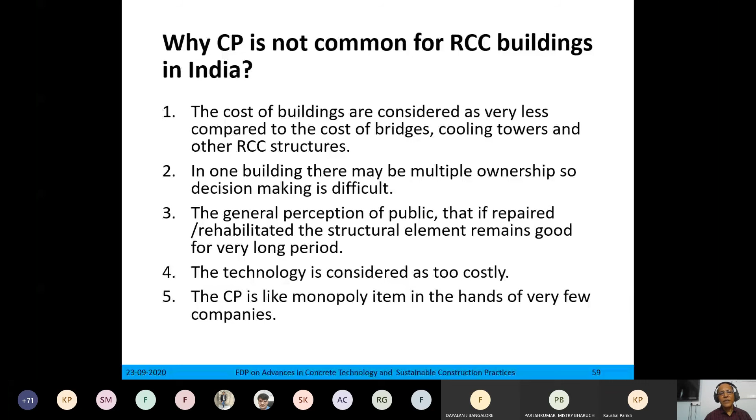And obviously, whatever I am saying about sacrificial surface anode technology is also not common. I have seen many research papers and catalogs of many companies. Probably the problem is that nobody takes the risk to drill holes, put the anode inside, and probably the owner will not allow further deterioration.

This is the fact mentioned in ISO 12696: cathodic protection of steel in concrete is a specialist multidisciplinary activity. Expertise is required in the fields of electrochemistry, concrete technology, civil and/or structural engineering, and cathodic protection engineering. This is the statement in ISO 12696.

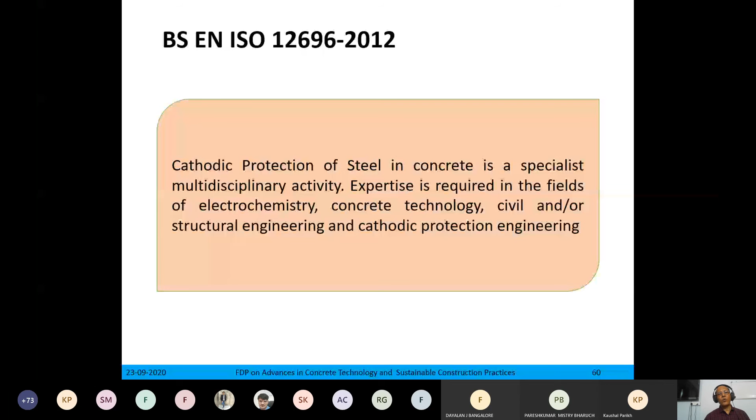So probably this is one of the major reasons why we are not getting consultants in the market for this technology for use in RCC buildings. Okay, now I will summarize the things which I have explained.

The sacrificial surface anode works effectively when installed on the surface of concrete adjacent to reinforcement. We want the shortest path to be traveled by electrons, so obviously it should be placed near the surface, at the location just behind the bars, behind the cover. Second, the difference of half cell potential of anode and cathode is less in closed circuit than open circuit due to resistance of concrete and steel.

If you measure the half cell potential of the anode separately and the reinforcement separately, you get different values. When you connect them, it becomes less. When multiple anodes are installed, there is distribution of current among all anodes, because if you consider one floor, all reinforcement is connected to each other with binding wire contact. So every reinforcement allows the flow of electrons, and there is distribution following the shortest path. So you cannot say that electrons generated here will flow to a particular anode - anywhere it can go.

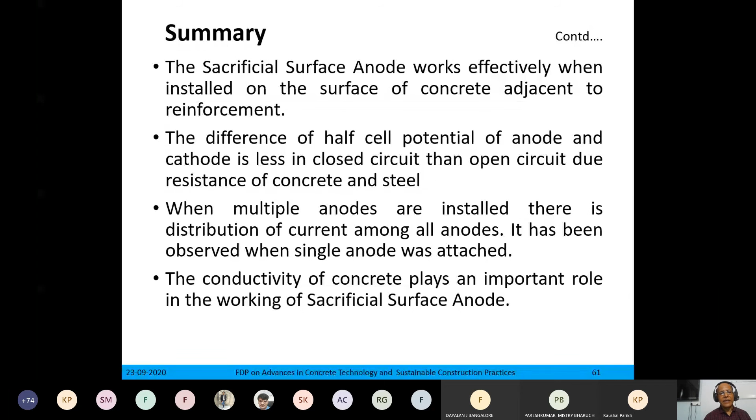The conductivity of concrete plays an important role in the working of the sacrificial surface anode. Obviously, this is the basic requirement - conductivity is required.

The location for installation of such anodes is possible only by investigation, not by any standard procedure. Many people ask me whether there can be a program that, if I feed it data, can give the strategic locations for installing anodes. No, it is not possible. Every mapping has to be done - reinforcement mapping at every place.

Then with respect to half cell potential, that will give the condition of the reinforcement. On that basis, you have to decide the location of anodes. The concept is that wherever the most negative value is, you first protect that and then go to other places. This method of CP is different from all other CP methods, hence a patent is applied for.

Thank you. I hope I am actually showing the fact. You may be disappointed that after so much good concrete, why this is happening, but this is happening and this is a fact. This real fact you have to accept, and you are the protectors of this and society, and accordingly you protect our structures because this is a national loss.